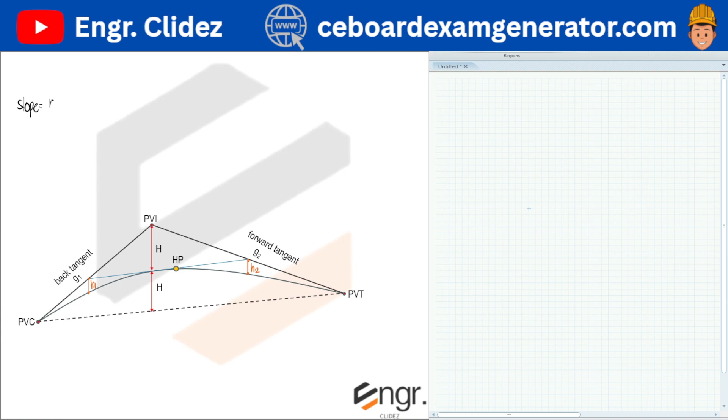Now recall that slope is equal to rise over run. So if you want to compute the vertical distance or the rise, then that would be the slope multiplied by run. So essentially, the vertical distance is equal to the grade since we refer to the grade as the slope, and run naman is the horizontal distance. Of course, measured from the vertex of the triangle. So we can extend this line so that we can draw a line from PVT going to this point, and we can form a triangle. We have a similar triangle. So from PVT, we draw this vertical line, and we can see this triangle. We can also define this line, copy lang natin to.

Now for unsymmetrical parabolic curves, we define the length sa left side ng PVI as L1. Again, the length is the horizontal distance lang. Sa right side naman, this would be L2. So if this is L1 and this is L2, we can actually define the vertical distances of these triangles, this one and this one. So for this triangle, using this formula, this grade corresponds to G1 along the same line. So this vertical distance would be G1, slope multiplied by run. This horizontal distance from the vertex of the triangle is equal to L2. So this would be G1 multiplied by L2.

And for this side naman, going to PVT, this line corresponds to G2. And this grade is actually going downward. We can define this as a negative grade. Now we will be using algebraic signs for the purpose of simplification sa pag-identify kung saan located yung highest point or lowest point. So ibig sabihin, kung negative yung slope, we need to use a negative sign. And if positive yung slope, we need to use a positive sign. So this would be negative G2 multiplied by L2. And so obtaining the total height going to PVT, add lang natin yung dalawa. We have G1 L2 minus G2 L2. And simplifying, since L2 is a common term, this total height would be G1 minus G2 multiplied by L2.

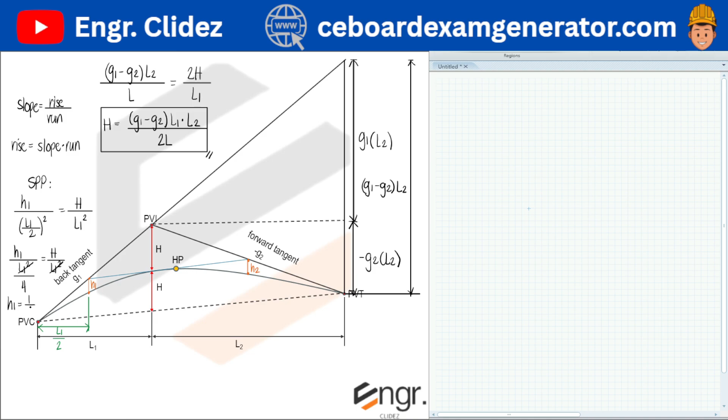Then, equals H over L1 squared. So, magka-cancel yung L1 squared. So, we have 1 over 4 sa denominator. We can multiply it sa right side. So, we would have H1 is equal to 1/4 of H. Now, if we also consider the right side, then we would have this ratio proportion. H2 would be to this horizontal distance. This would be L2 over 2.

So, di ba yung mangyayari dyan, H2 is to L2 over 2, quantity squared, then equals H over, dito naman sa right side ng PVI, we measure the distances from PVT. So, for this H, we have L2. So, H is to L2 squared. And notice na magka-cancel yung L2 squared dyan, saka ito. And 2 will be squared, magiging H2 over 1/4, which is similar to this equation. Ibig sabihin, yung H2 pala is also equal to 1/4 of H.

Now, if we know that H1 and H2 are equal to 1/4 of H, then we can use the formula sa symmetrical parabolic curves. Ito yung G1 for this line, ito naman yung G2. Itong nasa gitna, from this point going to this point, if we draw a line connecting this point and this point, then we call this G3. And this is tangent to the point on the curve just below PVI. So, define natin yan as G3.

If we look at our first symmetrical parabolic curve, this would be G1 and this would be G2, diba? But G2 is equal to G3 sa figure natin. And dito naman sa second symmetrical parabolic curve, the back tangent would be G3, and this would be negative G2 pa rin. Now, alam natin na sa symmetrical parabolic curves, H is equal to G1 minus G2 multiplied by L over 8. We were also able to derive this formula.

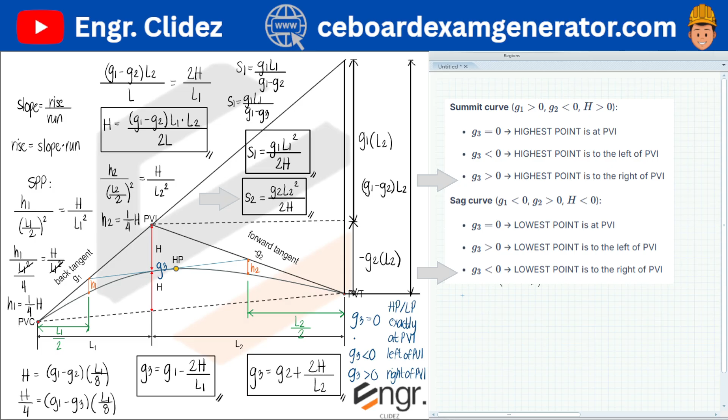And we will use S2 naman if the highest point is to the right of PVI. So, take note lang sa conditions for summit and sag curves. Hindi siya same sa symmetrical parabolic curves, wherein kapag in-add mo yung S1 saka S2, mag-i-equal siya sa total length. Dito naman, if you add S1 and S2, hindi siya mag-i-equal sa total length. So, that's why very strict yung condition natin. We need to first check G3 before we can identify the location of the highest or lowest point.

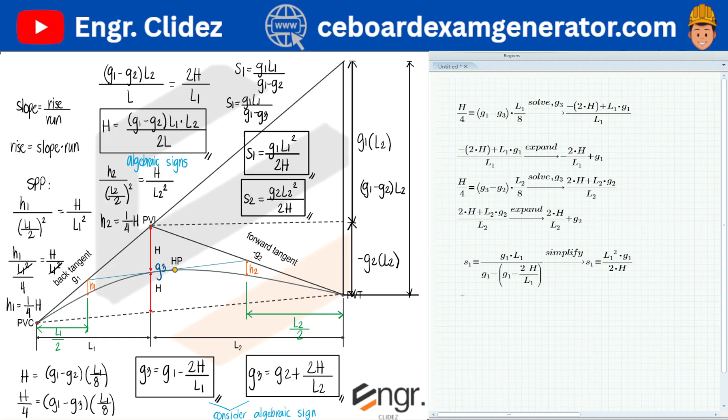And of course, since distances yung dalawa, we need to use the absolute values for G1 and G2. Bale, kapag negative yung grade, we still need to use the positive term. So, we only consider the algebraic signs when computing G3 and also H. Emphasize lang natin ito, algebraic signs. Ayan, ito rin, itong dalawa. Consider the algebraic signs. So, ito na yung summary of formulas natin. And this is our first problem.

An unsymmetrical parabolic curve has a forward tangent of negative 8% and a back tangent of plus 5%. The length of curve on the left side of the curve is 40 meters long, while sa right side naman is 60 meters. So our total length is equal to 100. PC is at station 6 plus 780 and it has an elevation of 110 meters. We need to compute the elevation of the highest point and also the elevation at 6 plus 840. So, take note na sa stationing natin sa unsymmetrical parabolic curves, we also need to use the horizontal distances lang. Same lang sa symmetrical parabolic curves.

So, we first draw our figure. Our back tangent is 5%. This is smaller than 8%. So, we need to emphasize na yung first tangent line natin is narrower than the second tangent line. So, this would be our first tangent line. Ayan. We define this as PVC.

And our second tangent line naman, our forward tangent is negative 8%. So, that would be steeper. We have this figure. And we need to emphasize na sa left side ng PVI, 40 meters kasi yan. Sa right side naman is 60 meters. So, mas malaki siya sa right side. Reorient na lang natin yung drawing natin.

So, medyo tricky yung pagka-state ng problem since, di ba, ito yung forward tangent and ito naman yung back tangent. But kapag hindi mo binasa yung problem, if you assume na negative 8 yung first na tangent or the back tangent, then magiging ganito yung figure mo. Negative 8, left to right, downward. Then positive slope naman, 5%, left to right, upward. Ayan, magiging sag curve siya.

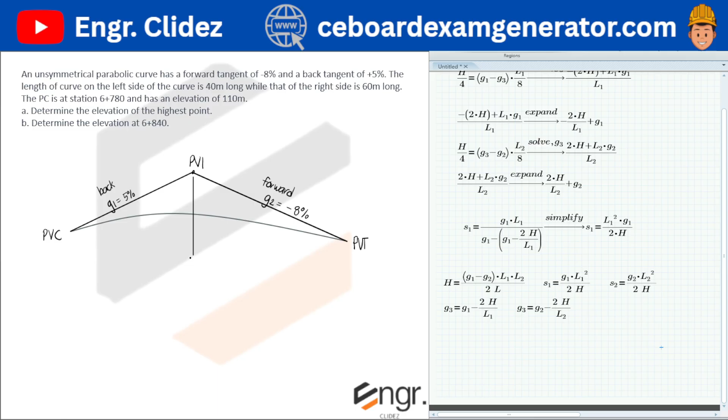Now, the length of the curve on the left side of PVI, this is PVI, ito naman yung PVT. Sa left side daw, we have a distance of 40 meters. So this would be L1. And sa right side, we have a distance of 60 meters. This is our L2. And of course, this maximum offset is equal to H.

So for the first question, we want to identify the elevation of the highest point. So before natin yan ma-solve, we need to first determine kung saan yung location ng highest point or lowest point. So we need to solve G3. To solve G3, alam natin na yung G1 is equal to 5%. In decimal, that would be 0.05. Then minus 2H over L1. 2H, L1 is equal to 40. So we have this formula for G3.

However, yung H, hindi pa natin alam. But we also have a formula for that. H is equal to G1 minus G2. G1 is 0.05 in decimal. And G2 naman, again, we consider the algebraic signs. So minus G2, G2 is negative 8%. So we have minus negative 0.08. Ayan. Then multiplied by L1 times L2.

L1 is equal to 40. L2 is 60. Divided by 2L, L is equal to 40 plus 60, or that would be 100. But sulat ko na lang siya as 40 plus 60. So our H is equal to 1.56. So knowing that this is the value of H, we can now solve G3. So solving G3, we have negative 0.028.

So diba this value is negative, so lesser than 0. So diba kapag G3 is lesser than 0, this is pointing to the left. So the highest point is to the left of PVI. Yun yung pinaka-clue natin dyan. Now, alternatively, you can solve G3 using the other formula. G2, sorry, this is plus pala. Mali yung na-type ko dyan. Ayan, G2 plus 2H over L2.

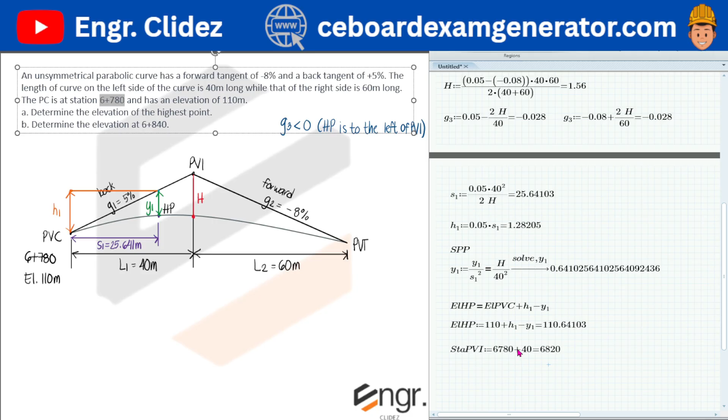Now, for the second question naman, we need to determine the elevation of 6 plus 840. Now, ano yung difference ng 6 plus 840 sa stationing ng PC? Check natin. By the way, mas maganda pala if we will solve the stationing of PVI. Yung stationing ng PVI will just be the stationing of PVC, which is 6780, and we add L1. PVC plus L1, yun na yung PVI na stationing. So, plus L1, L1 is equal to 40. Ibig sabihin, yung stationing ng PVI is 6 plus 820. Lagay na lang natin dyan.

6 plus 820. So, knowing the stationing of PVI, mas madali nating ma-identify if this is to the right or to the left. Since yung 6 plus 840, mas malaki siya sa 6 plus 820 by an amount of 20, then this station pala is located 20 meters from PVI. So, let's say, nasa point na yan. So, paano natin siya ma-identify kung ano yung elevation dyan? We have two options. We can start from PVI or from PVT. But dito sa solution natin, let's just start sa PVI. So, if we start from PVI, we need to identify the elevation at this particular point. So, to solve that, we need this vertical distance.

From PVC, we can define this as H2. So, di ba yung H2 magiging slope multiplied by run, which is G1, multiplied by this whole distance, which is equal to L1. Again, we are now considering this triangle. So, H2 is equal to 0.05 multiplied by L1. So, this would be 2 meters.

So, the elevation of PVI is equal to the elevation of PVC, which is 110, plus H2. So, this is 112 pala. So, elevation, 112 meters. Now, from this elevation, we can consider another triangle from PVI going to the point on the tangent line above our station. So, dito banda. Again, this is station 6+840.

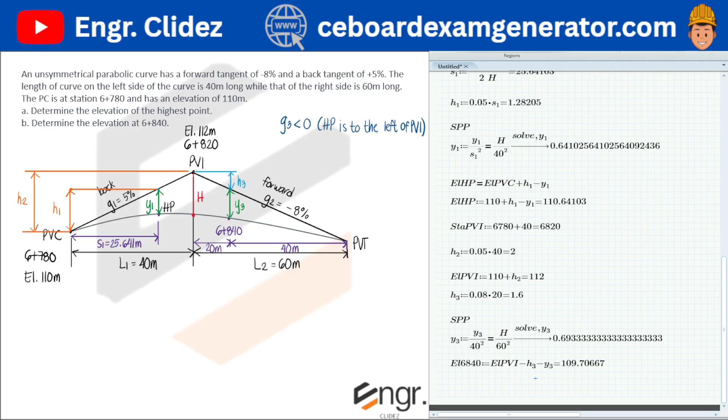So, ito yung summary ng answers natin. Now, I actually have an application that could check unsymmetrical parabolic curves. So, dito ka lang sa surveying, we have our unsymmetrical parabolic curve solver, which is under our web applications. If you visit our website, just click on the navigation bar, then go to web applications. So, we click on open.

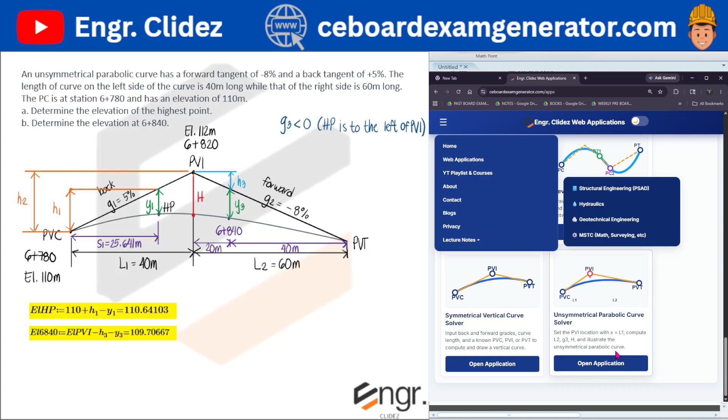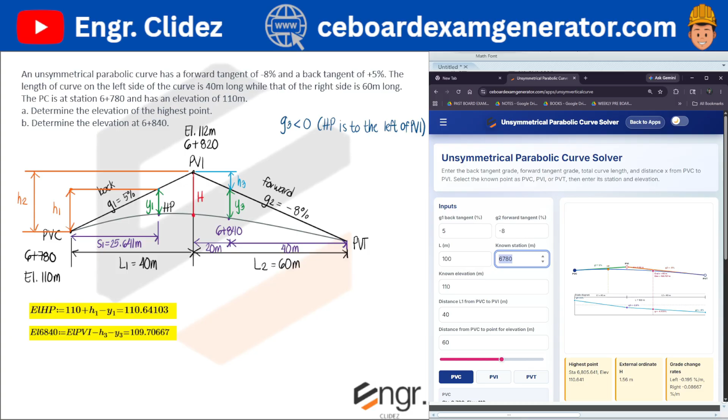Yung value ng G1 natin is 5%. Yung G2 naman is negative 8%. Our total length is equal to 100 since 60 plus 40 is 100. And our known station is for PVC. So, for the known station, you need to click this one. Kapag PVI yung given, you need to click this. If PVC yung given, ito naman. Then, if PVT yung given, you give the station and also the elevation. So, yung elevation ng PVC is 110 meters. And L1 from PVC is equal to 40.

So, if you look at the highest point here, the elevation of the highest point is 110.641. Same lang sa nakuha natin kanina. And yung 6+840 naman, that would be 40 plus 20 meters, 60 meters from the left. So, kapag in-input mo dyan, distance from PVC to the point for the needed elevation, input natin 60. We can see sa slider natin na this is 60 and yung corresponding elevation niya is 109.707.

Medyo hindi siya clear dyan since half lang ng browser yung ginamit natin. So dito mo na lang siya i-check. At x equals 60 meters from PVC, the elevation is 109.707, which is the same sa nakuha natin dito. So you can use this tool for checking.